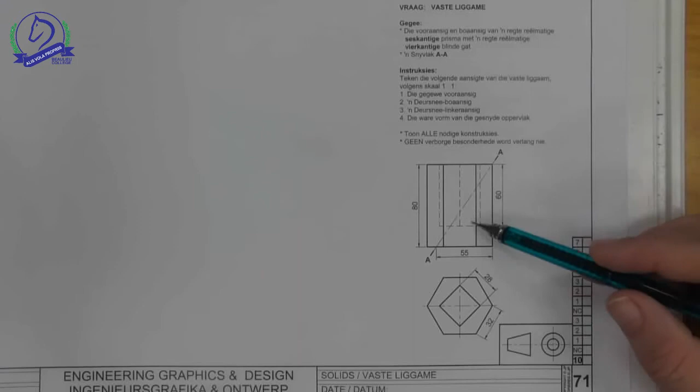Today I'm looking at page 71 of your workbooks. This is a geometric solid, a little bit different where this is a hexagonal prism with a square prism as a hole on the inside, a blind hole, meaning that it's not going all the way through the shape, and with cutting plane AA.

So they want you to do the given front view, the sectioned top view, the sectional left view, and then the true shape. So if we just remember the positioning of our views, remember this is the symbol for first angle, the tapered roll is always the front view, the circles are always the left view. In third angle it's opposite.

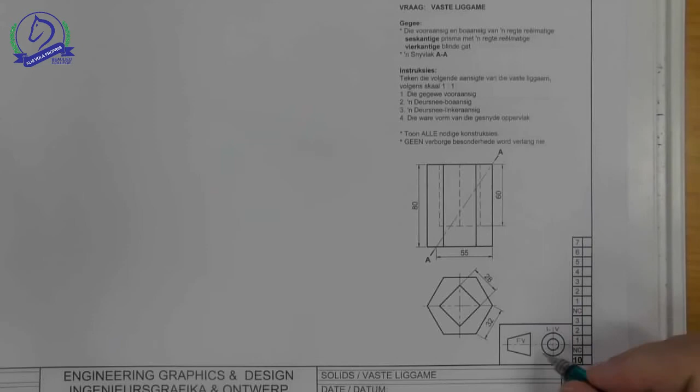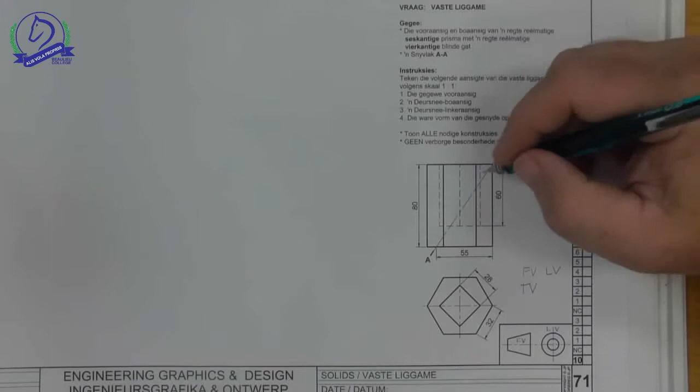So if we are looking at the positioning for the views in this, the front view is the most important view, the top view is opposite at the bottom, and the left view would be opposite on the right of the front view. This would also mean that we want to take the auxiliary view, the true shape across on that side, or we're going to rotate it and put it here.

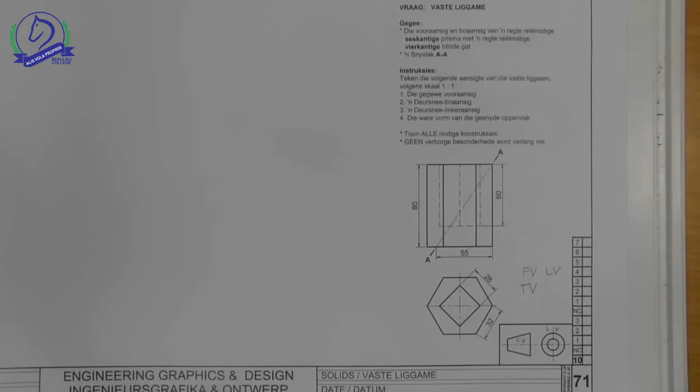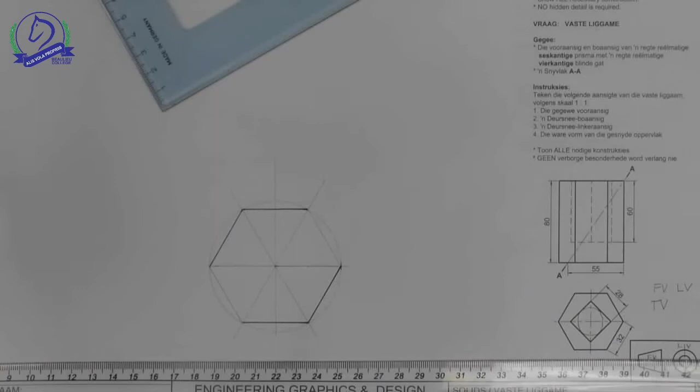So I'm going to get started by drawing the constructions of the hexagon and then the square prism. There I have my hexagon with a length of side of 32. I'm now going to do the square prism. So let's remember what we're going to do for this is we're going to draw a circle with a diameter of 28 and then draw tangents at an angle of 45 degrees to get this shape.

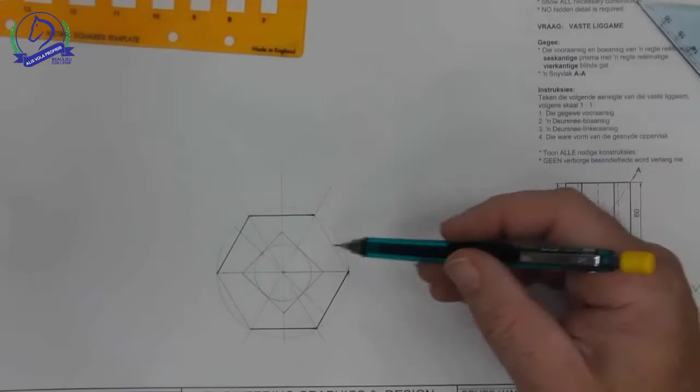And there we have our square. So remember the diameter of the circle is equal to the length of side, 28. Draw the circle and then draw tangents touching the edge of the circle at an angle of 45 degrees. Now what I'm going to do is project my lines up to get the front view. I'm going to leave a space of 15 millimeters between the views.

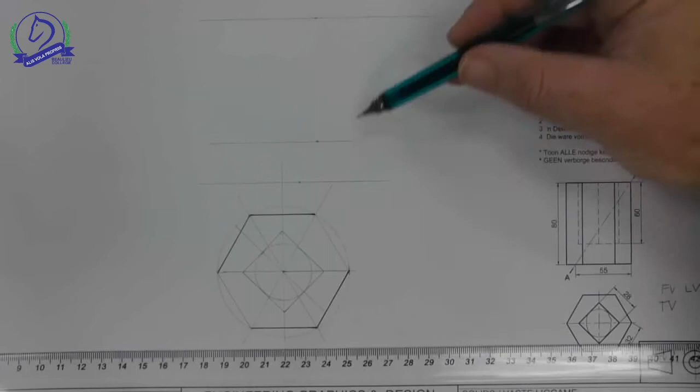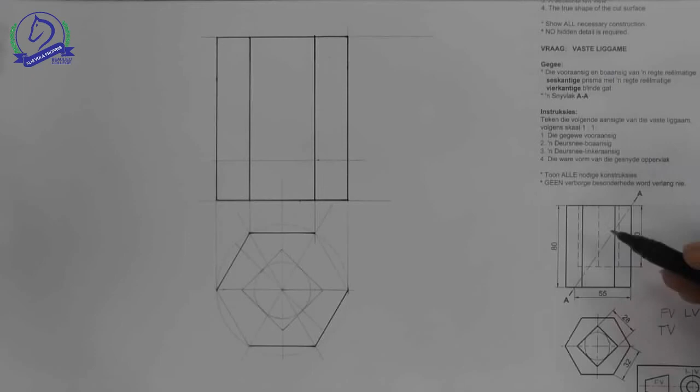There are my height dimensions of 80 and the distance down for the square prism of 60. Now I'm going to project up my length dimensions to get my shape. There I have the outline of my hexagon, and now just to put in the hidden detail for the square prism.

There I have finished the front view. So we've put in the hidden detail for the square prism. We've put in the cutting plane. Remember, a dark or thickened line at the end of your cutting plane, and the labels AA. It's a chain line, so long dash, short dash, long dash.

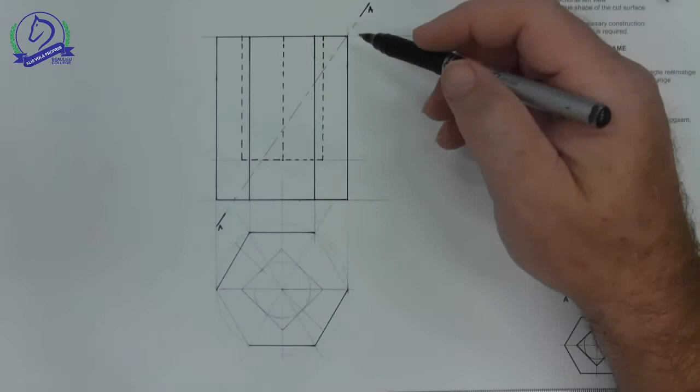Now let's take the top view, and I'm going to label the top view and follow those points to my front view and then work out the cutting plane. The prism is a little bit easier when you need to section it, because the lines obviously are on vertical lines joining the base of the prism to the top of the prism.

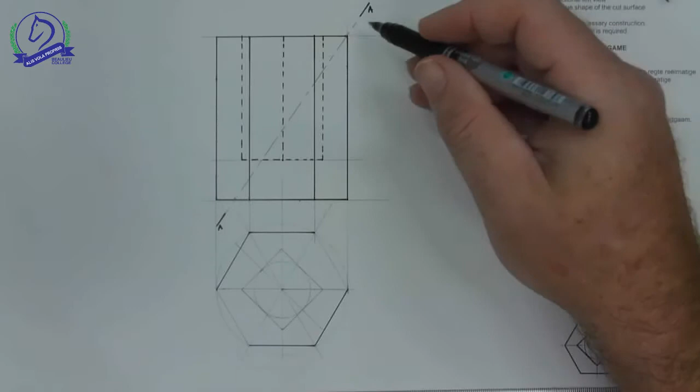Here I've labelled my square prism A, B, C and D. I've labelled those in my front view. I've labelled the hexagon 1 to 6, and I've labelled the corners for the front view 1 to 6. So let's see where the points are now on the cutting plane. So A gets cut here.

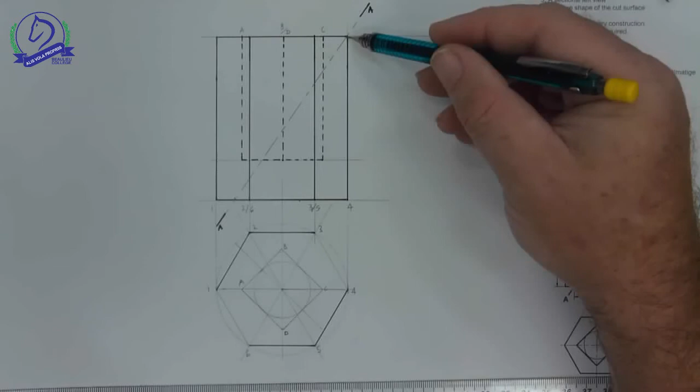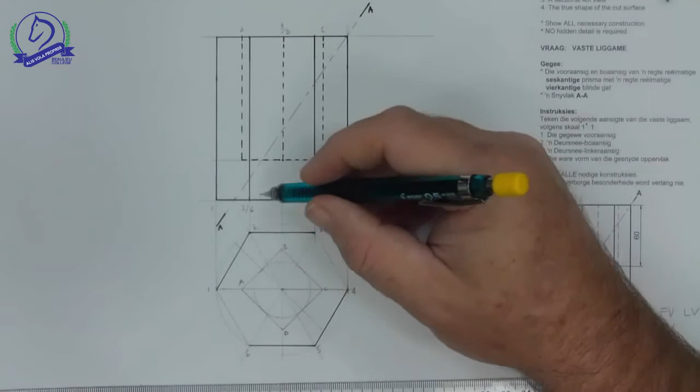Cutting plane AA cuts point 4 at this edge, which when we follow the point down is exactly on that point. The same with point 3 and 5. It cuts exactly on this point because it's on a vertical line. Point 2 and 6 we have the same story. The only change here is the line gets cut at the base of the shape.

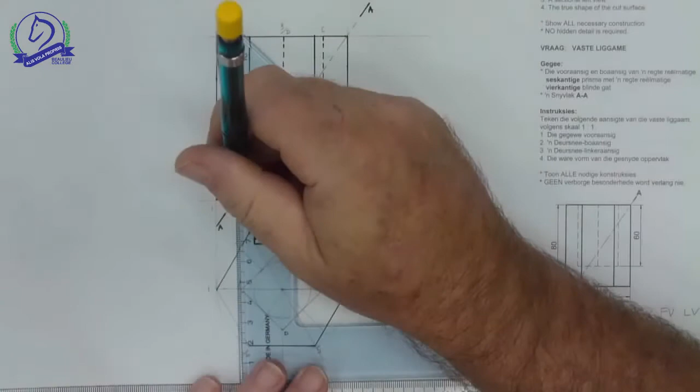So this is going to be the base of 1 going to 2, 1 going to 6, and it gets cut away at this point. So I'm going to take that point and project it down. And that gives us the shape that we would see as the sectional view. So this corner has been cut away, this joins up, and then the rest remains the same.

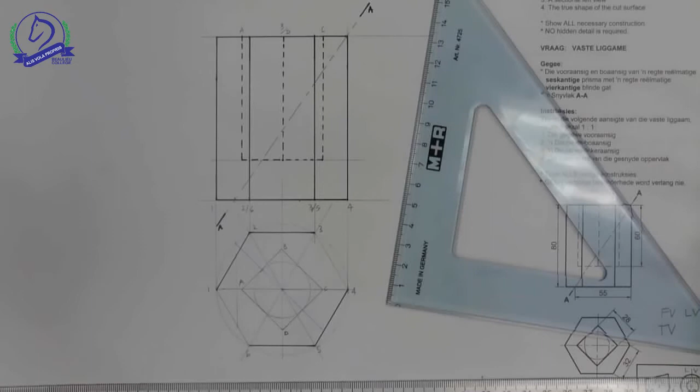I'm just going to go over that in a dark line now. There is the outline of my sectional top view. I now need to do what the section is going to look like on the square prism. So let's follow the points down.

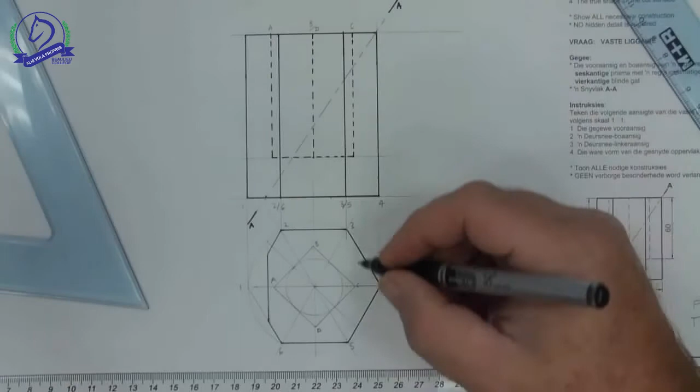Here is point C, which gives us this point C. Point B and D are going to be at those exact points. Then it cuts the base of the shape at this point. So we're going to project this down and join up the edges of the base.

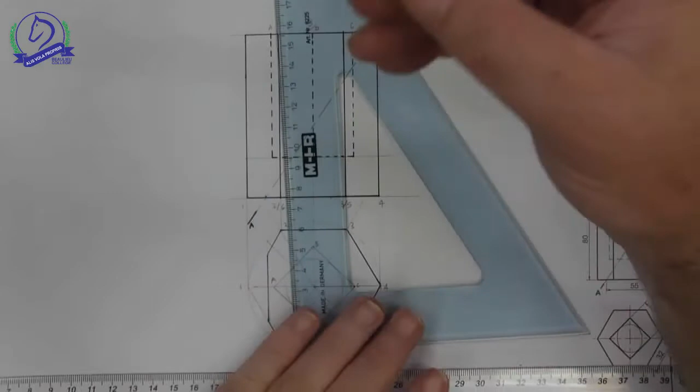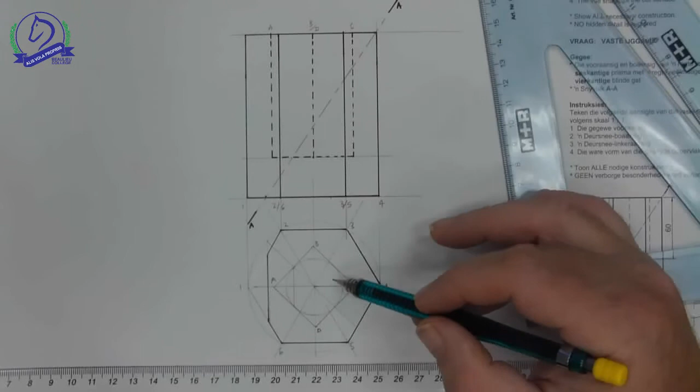And that would give us the outline shape that we need for this section. I'm going to go over that in the dark line now and then start putting in my hatching. Remember that this is a hole, so there can't be any hatching in this aspect here. There's just going to be hatching on the outside of the shape.

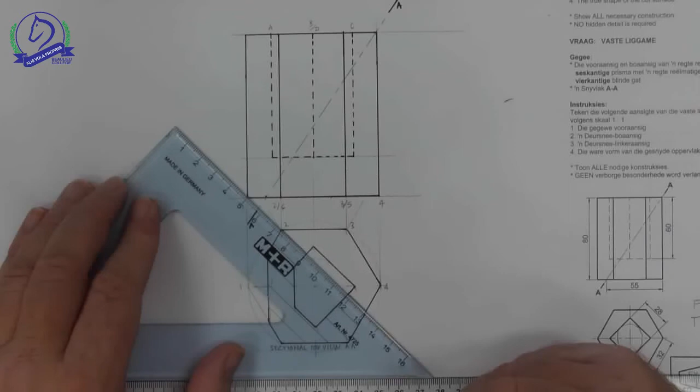So while I'm doing my hatching, just a little trick to try and make sure that your hatching all stays the same measurement. What I'm doing is I'm lining up the bottom of these numbers on my set square to make sure that my spacing stays the same for my hatching. So they are slid across each time I need to do my next line to make sure that the spacing stays the same. It's a big shape, so that's why I've made the spacing a little bit bigger for this view. And there I have the complete sectional top view on AA.

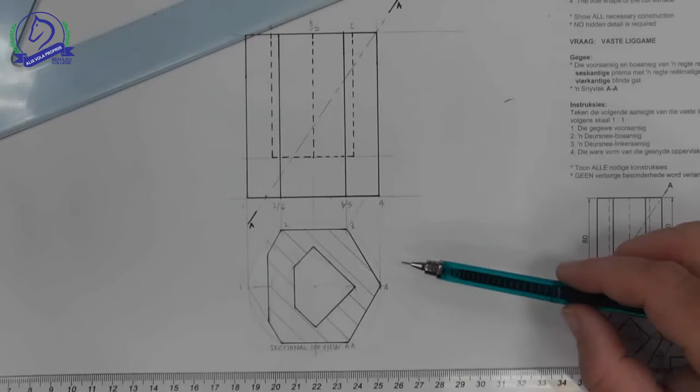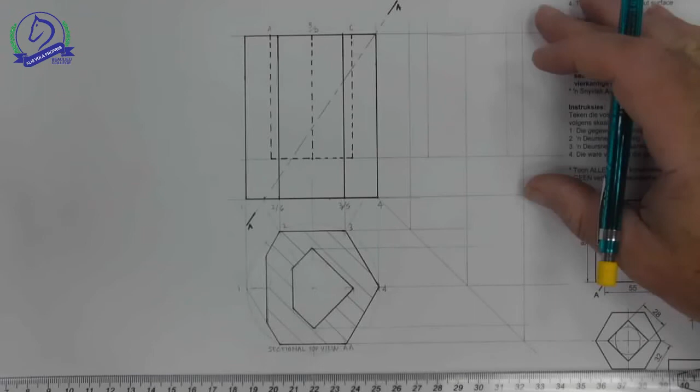So next we need to do the left view. So I can project my 45-degree line here, project my width dimensions across and up, and take my height dimensions across from my front view. We've got the outline now of my left view by projecting my height dimensions from my front view and the width dimensions from my top view. Let's look at where the cutting points are now by just remembering the numbering.

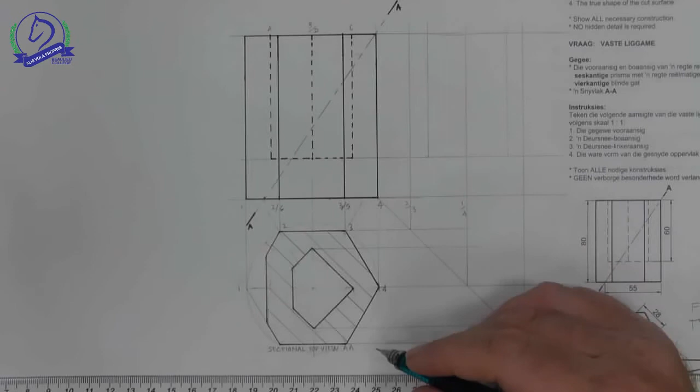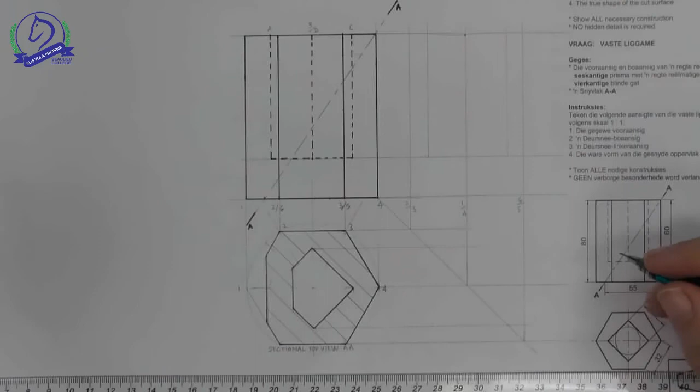So if we look at this, here is line 2 and 3. This is line 1 and 4. This is going to be line 5 and 6. So this is line 4, and we need to follow line 4 across on this side. That's going to give me point 4. The next is going to be where it cuts line 3 and 5. So where it cuts line 3 and 5, I'm going to project this across to cut line 3 and cut line 5.

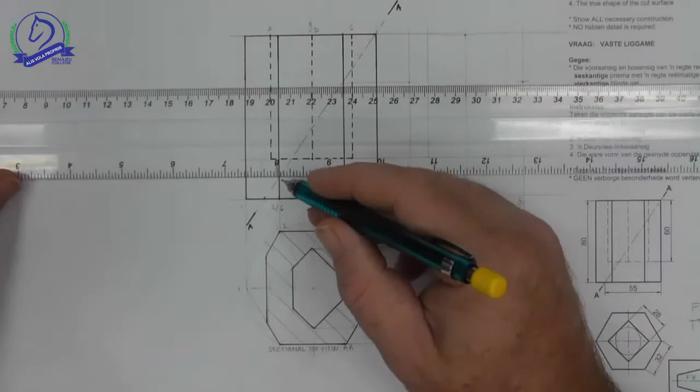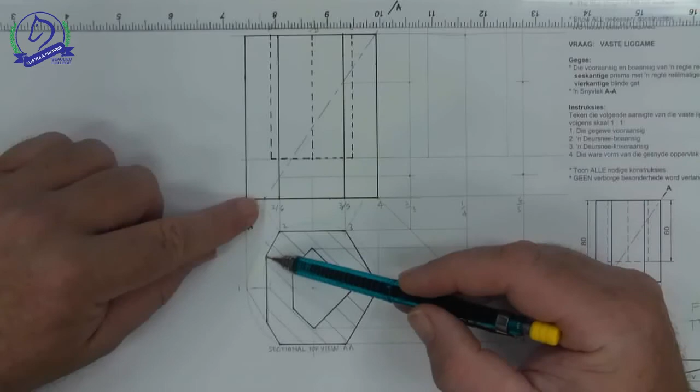The next point is at point 2 and 6, so I need to follow this line across to where it cuts point 2 and point 6. Now where does it finish? It cuts the base at this point. Now this isn't going to give us a point, and if it doesn't give us the point that we can use to find it, we need to go into the next view. So that means we're coming down into the top view. Here is where this 1 point is, so I'll take that across and then project it up vertically.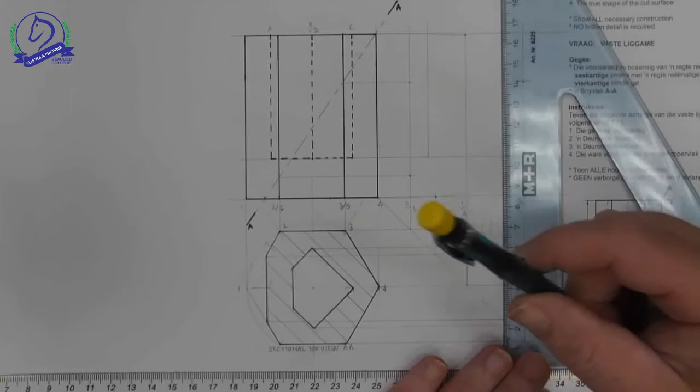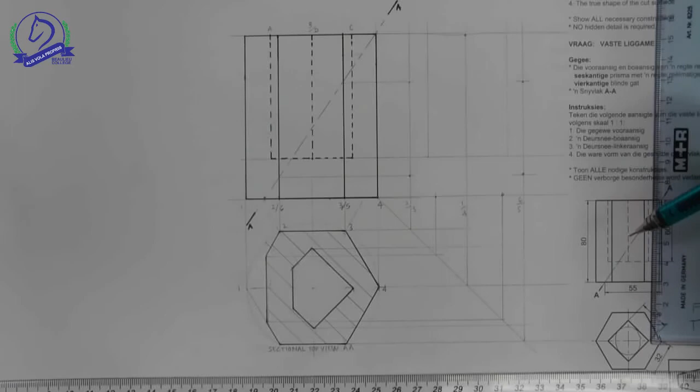So it's giving this point on the base. Here is where the second point is on the base. Project it across to your 45-degree line and project that up, and that's going to give us our next point. So here we have the outline of our section. It's tapering down to the edge, straight line down to the base, across, up, and joins up to the other side. I'm just going to go over that in my outline now. There is the outline of my hexagonal prism, and this little edge is going to not be hatched.

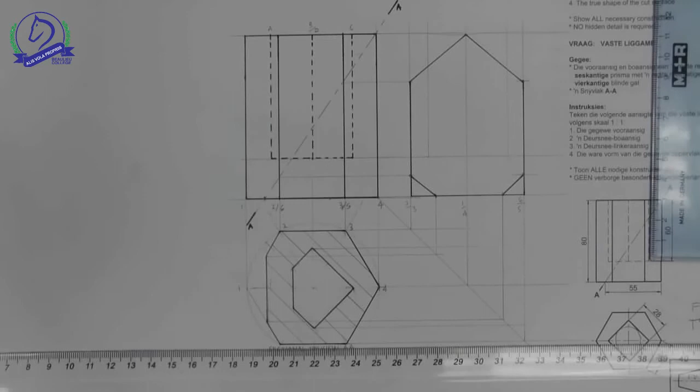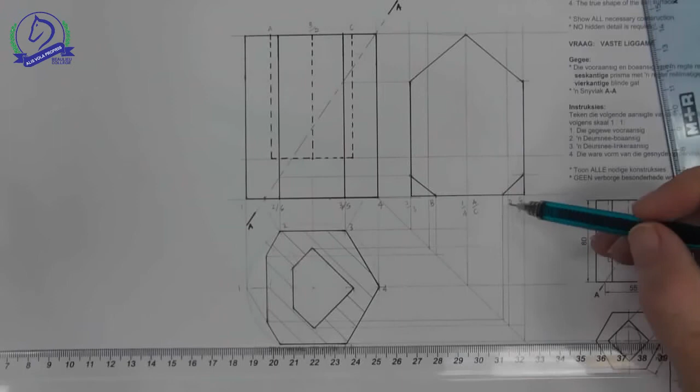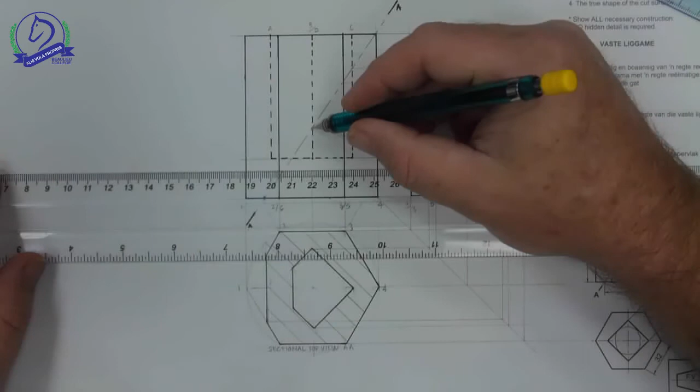Next, let's work on the square prism on the inside and find where those points are going to be. So I'm going to just follow my labels across to get each of the points. So I've taken my labels across, so this will give us points A and C for my square prism. This line across here will give me point B, and this corner will give me point D. Let's follow the lines across to the points. So point C gets cut at this edge here, so I need to project that across to where it cuts at point C. Here is where it's going to cut point B and D, so I need to project those across to find points B and point D.

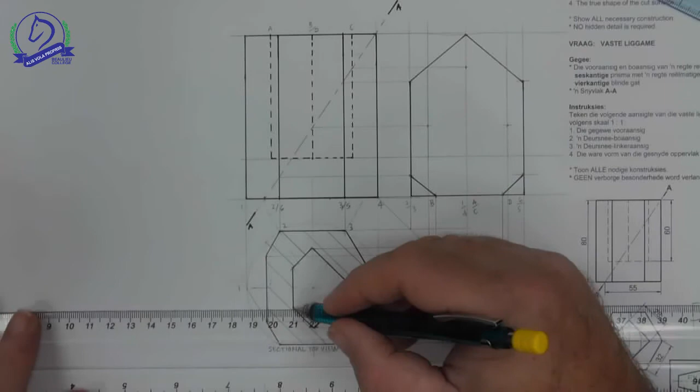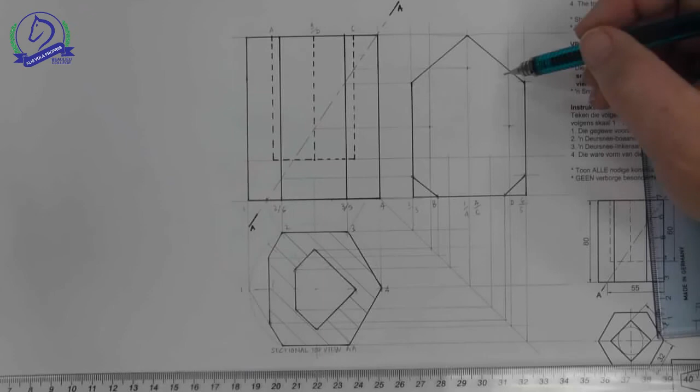Now it next cuts the base. Once again, the base is a horizontal line, so we can't find it there, so we need to come across to the top view and find where those points are on the top view, and use these edges to project across and up to find where it cuts on the base of my shape. There is what the shape would look like for my prism on the inside. I'm going to go over those in dark lines now.

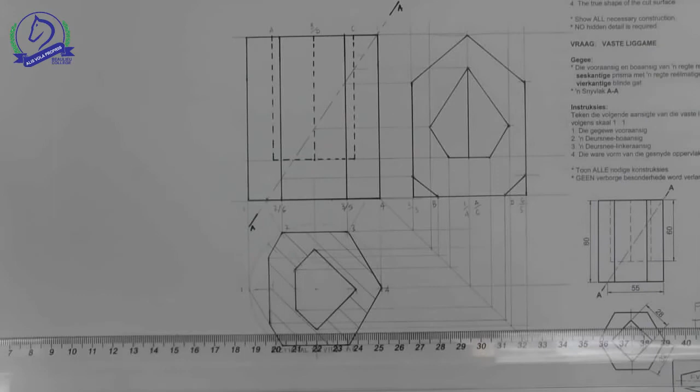This little edge here is the inside corner of the shape, so I need to draw that in, and I'm now ready to do the hatching on this inside little piece. There we have the completed sectional left view on cutting plane AA.

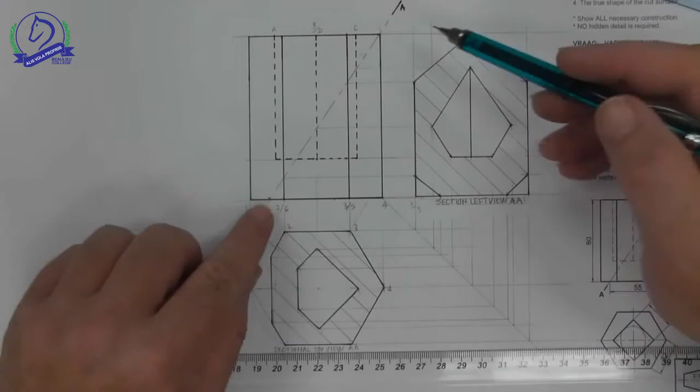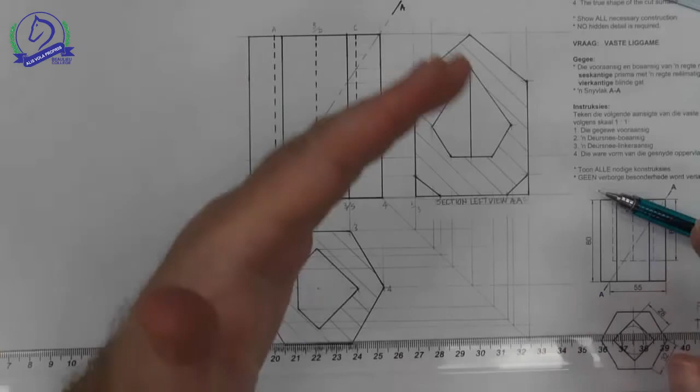So the last aspect of this drawing is the true shape. So remember, the true shape is going to look very much like this shape, except it should be longer. So remember, the true shape should be projected at right angles, and then we take our width dimensions off either the left view or the top view. Now the process we've done to get the true shape has been to take the cutting plane and rotate it using our compass and then projecting the lines across. So I'm going to follow that same process.

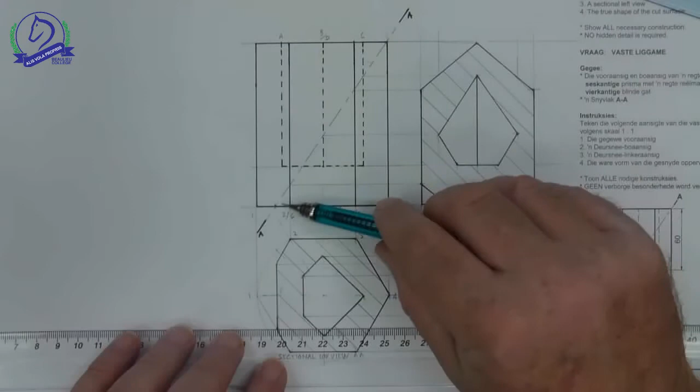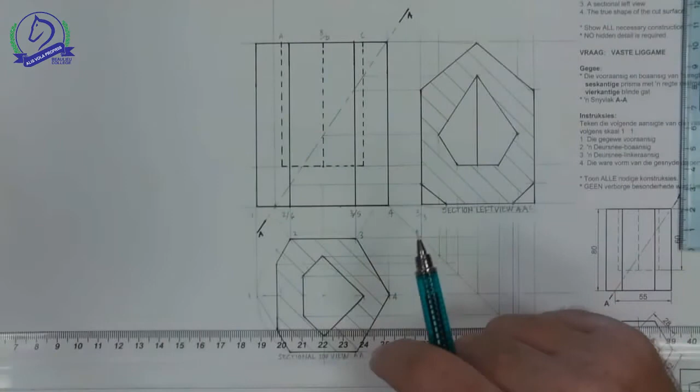So the most important thing about your true shape is getting this true length of the cutting plane. So what I do is, where it cuts the base of my shape, or wherever the cutting point touches the lowest point here, I'm going to draw a vertical line. I'm then going to take the different cutting points across to that using my compass, and then project it away on the side so it's out of the way of the rest of the view.

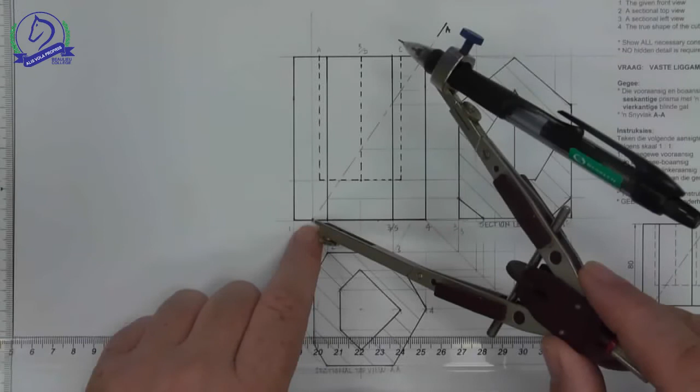So I'm now going to take my compass, I'm going to put it at the center, which is going to be where this touches the lowest point of our cutting plane. I'm extending it to where it touches my point 4 here. So there was point 4. I then bring it down to my next point.

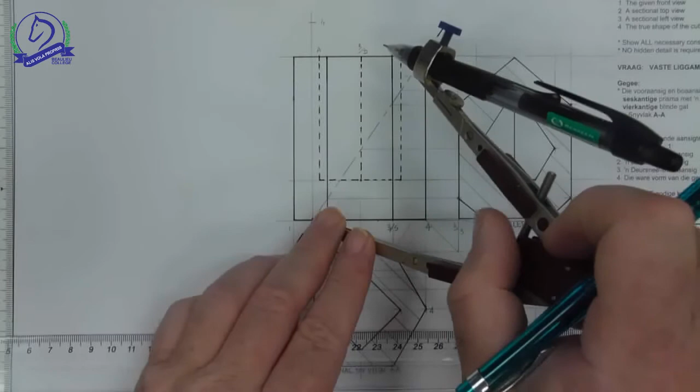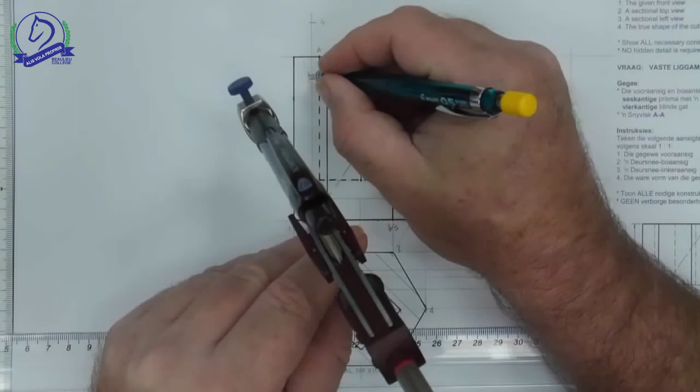Now I'm just going to do the hexagon first. So I need to bring it down to points 3 and 5. So where the cutting point is at 3 and 5, mark that across. So there's point 3 and 5. Bring it down to the next point here at 2 and 6. And project this across. So there's point 2 and 6, 3 and 5, and 4. Obviously this is the lowest point, which is 1.

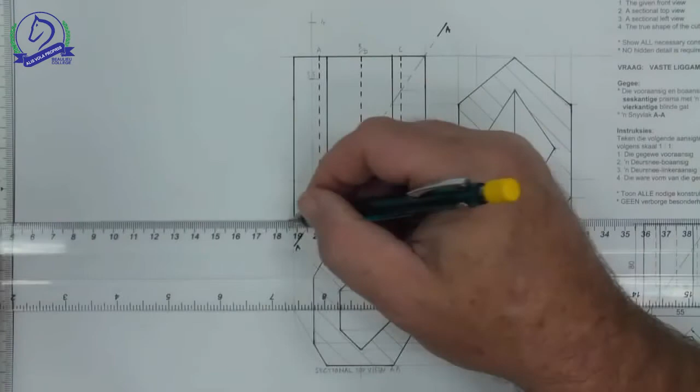Now I'm going to move this across to the side. So I'm just going to project these lines across to the side. And I'm now going to just pick a center point. And just go over these lines here. Okay, so there are my height measurements all projected across. Now we need to get the specific width dimensions that we need. So let's look at the shapes now.

So at point 4, the width dimension I can take either from my left view, because this is the width dimension, or I can take it from the top view. Either way, what I've done is I'm working off the center line, and the center line, a little bit like the fishbone method that we use when we draw isometrics. So this is point 4, which means that this will be the specific point 4 on my true shape.

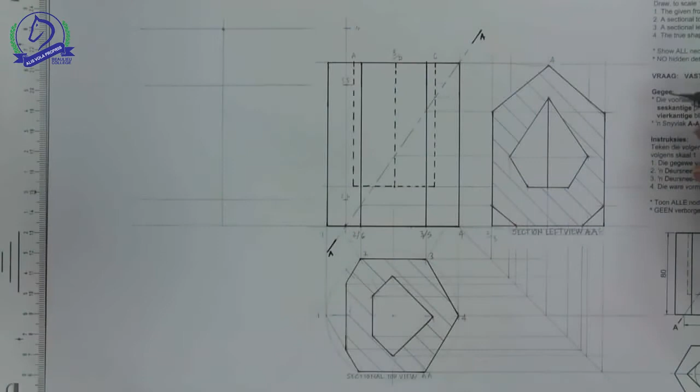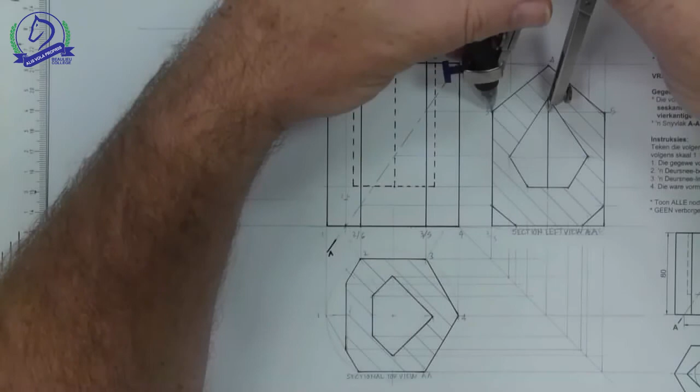Now the next point is going to be point 3 and 5. So here is point 3 and 5. So I need that width dimension. So I'm going to take my compass, using my center line, I take the distance to the edge of my shape. Here's the distance to 3, which should be the same distance to 5. I go to that height measurement and mark that off.

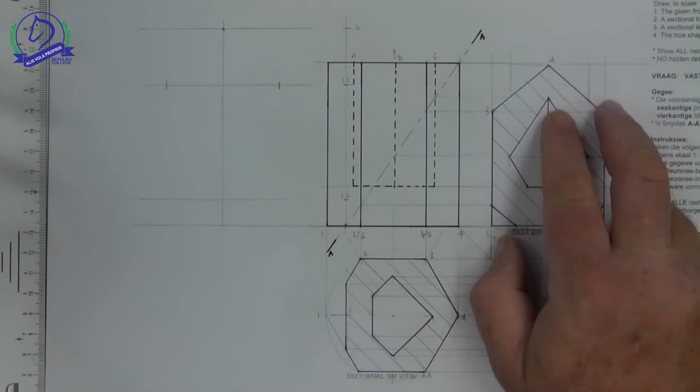Next we need to do the same at point 2 and 6. Now point 2 and 6 is the same width dimension as 3 and 5. So I've kept my compass at the same measurement, and I now go and mark that off over here.

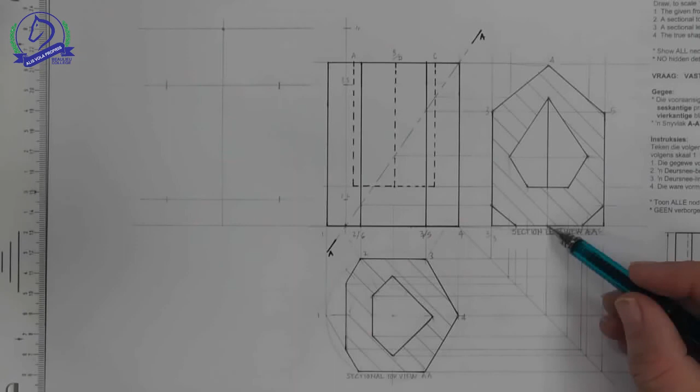The last point is at point 1. Now remember, the base got cut at this point. So what I need to do is either take the distance from the center to this edge, or we could come to the top view from the center to that edge, which would give us the same measurement. So there's my measurement. I come and mark it down here, and that gives me now the base or the outline of my true shape. I'm going to join up those points now. Here's the outline of my true shape.

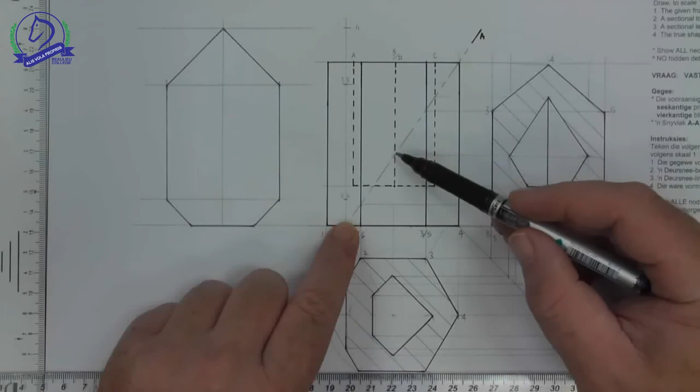Now what I need to do is work out the inside where the square prism fits in there. So we're going to follow the same process. We've used this edge here, and now where it cuts the various different aspects of the square prism, we're going to take our compass with that measurement and rotate that to the vertical line and project them across.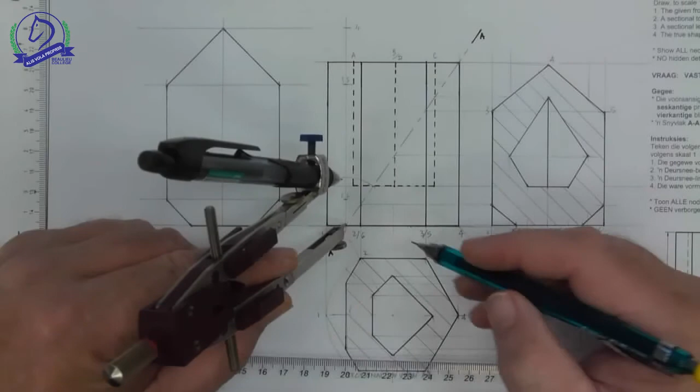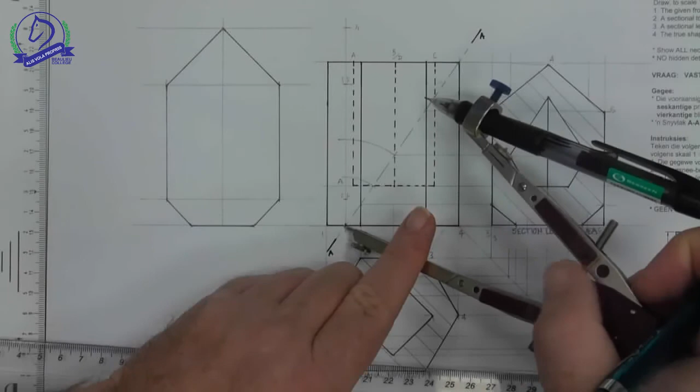Okay, so here's my first point, which is point A. Now next point will be points B and D, and my last point will be point C. So I've just put those arcs in there so you can see where they've come from. So there's point C, there's point B and D. Let's project them across.

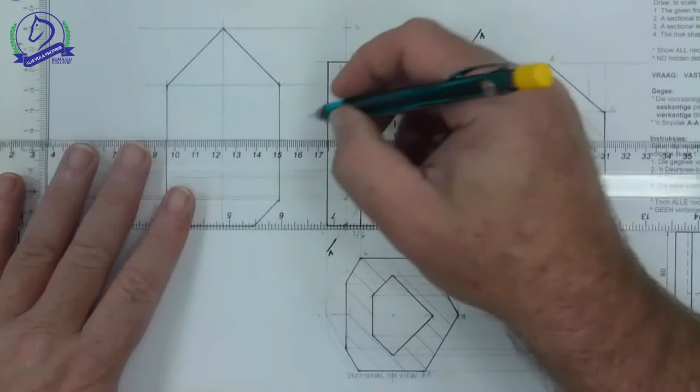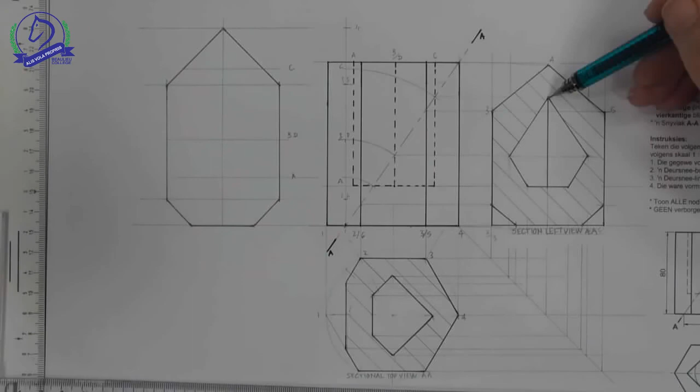And what we're going to do after this now is work out the measurements once again, either from your left view or from the top view. It's not going to make a difference. So let's find the points that we're going to need. Point C is this edge, and when we look at it as the width, it's on the center line, meaning that will give us this edge here.

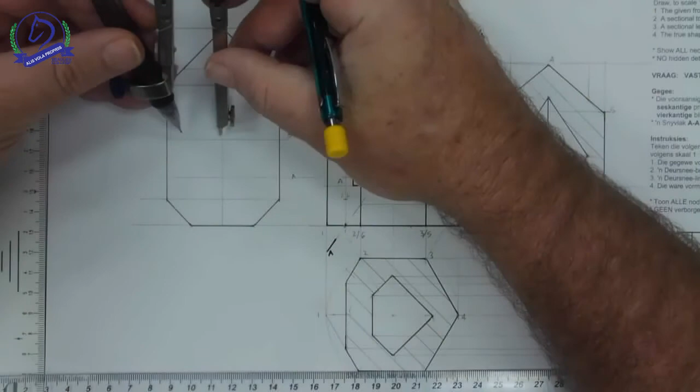Next we're looking at B and D. Here's B and D, the widest point. So I'm going to take my compass and get the measurements here for points B and D. Take that across to the center line in my true shape, mark off point B and mark off point D.

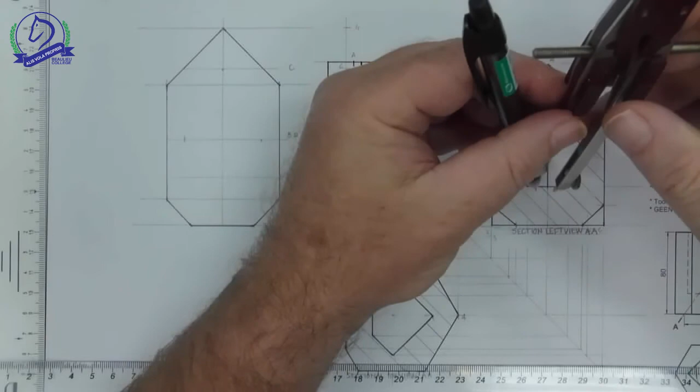The last point is point A, which remember is on the base, so we can either take it in the top view or we're going to come to the base here in the left view, get that base measurement, and let's transfer it to the true shape. There are the points that I need, and I'm now going to draw them in. There is the completed true shape of A-A with our hatching and the square prism hole. That's the end of drawing on page 71.